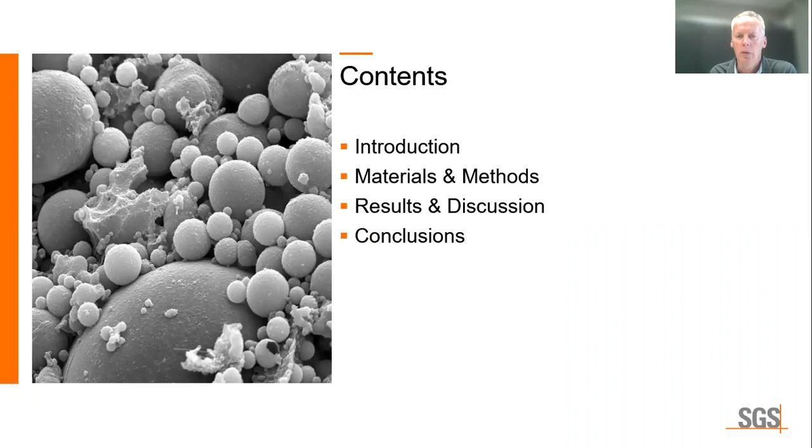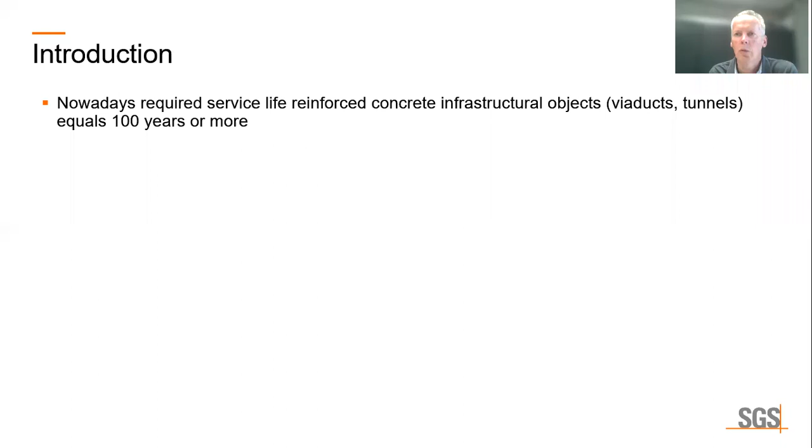Nowadays, the required service life of reinforced concrete infrastructural objects like viaducts and tunnels equals 100 years or more. The main degradation mechanism of these structures is chloride-induced corrosion of the reinforcement. The service life of such chloride-loaded structures is determined by the chloride load, the thickness of the concrete cover, and the resistance of the concrete to chloride penetration.

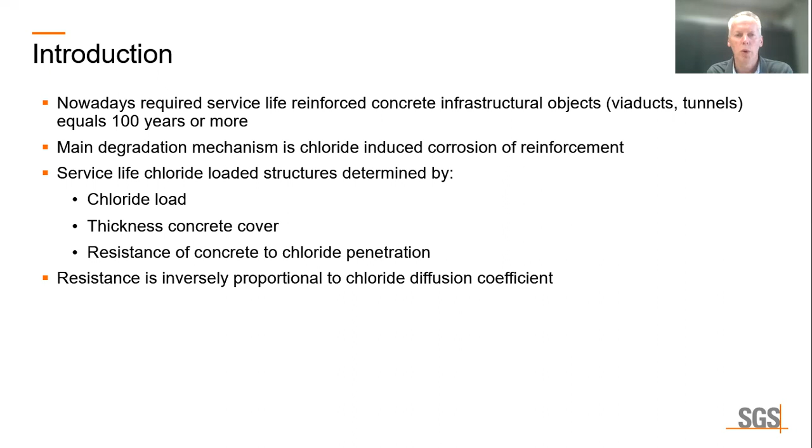This resistance is inversely proportional to the chloride diffusion coefficient. The chloride diffusion coefficient is time-dependent, and the time dependency is described by the so-called aging coefficient N. Here we show this in this equation, where D0 is the diffusion coefficient at the reference time T0, which is usually 28 days. T is of course time, and N is the aging coefficient.

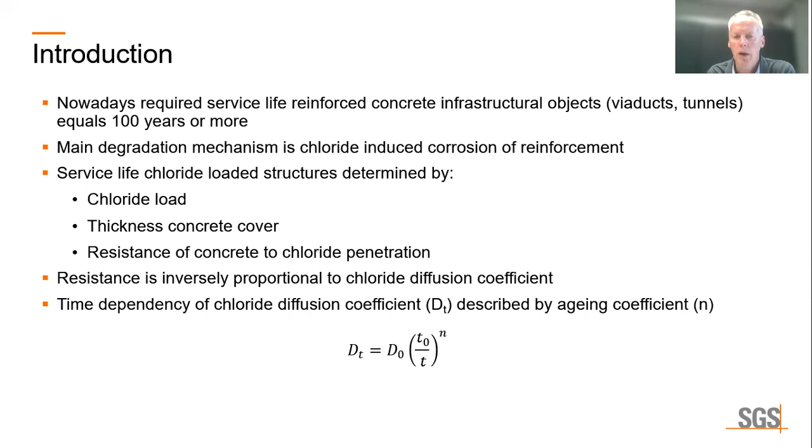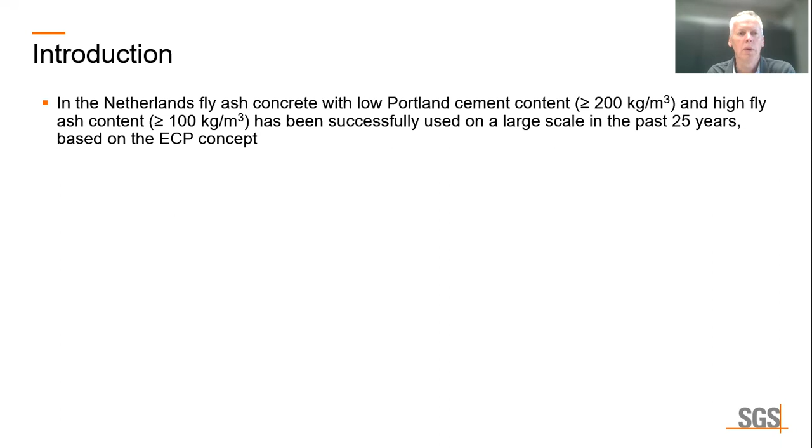In the Netherlands, we have used fly ash concrete with low Portland cement content and high fly ash content successfully on a large scale in the past 25 years, based on the equivalent concrete performance concept. However, it is well known that fly ash concrete has a high initial chloride diffusion coefficient, but shows a rapid decrease with time due to the pozzolanic reaction.

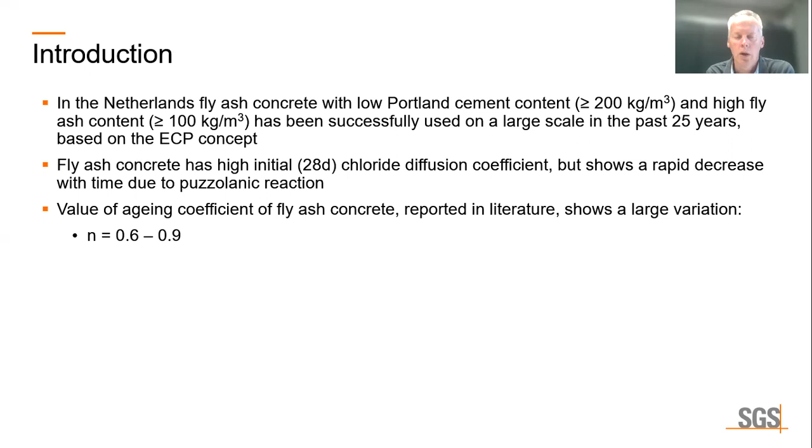Values of the aging coefficient reported in literature show a very large variation between 0.6 and 0.9, and such a variation has a very large impact on calculated service life. Therefore, a long-term research program has been performed to examine the effect on the aging coefficient of different sources of fly ash and different origins and strength levels of Portland cement.

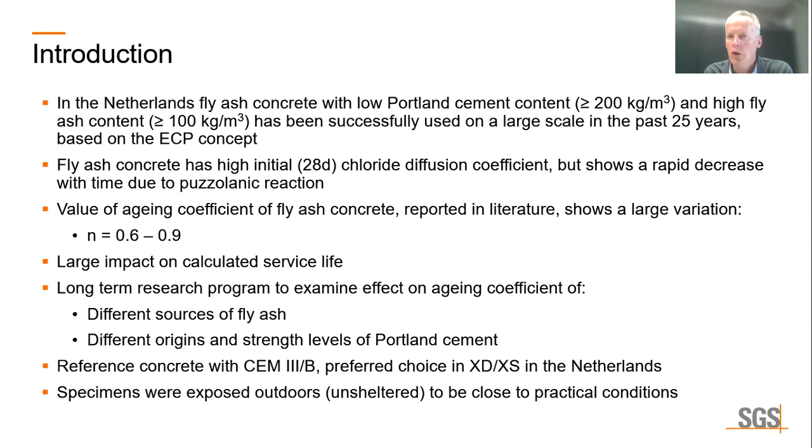In this program, we have used a reference concrete with blast furnace slag cement, which is the preferred choice in chloride-loaded environments in the Netherlands due to its high resistance to chloride penetration. All specimens were exposed outdoors, unsheltered, to stay close to practical conditions.

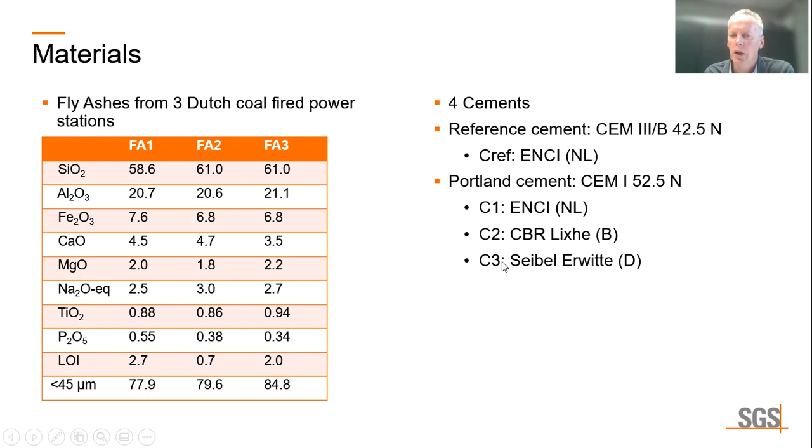We have used 4 cements in this investigation. The reference cement is a blast furnace slag cement from a Dutch cement producer. And we have used 3 different Portland cement qualities, all in the strength class 52.5 normal, C1 from a Dutch cement producer, C2 from a Belgian cement producer, and C3 from a German cement producer.

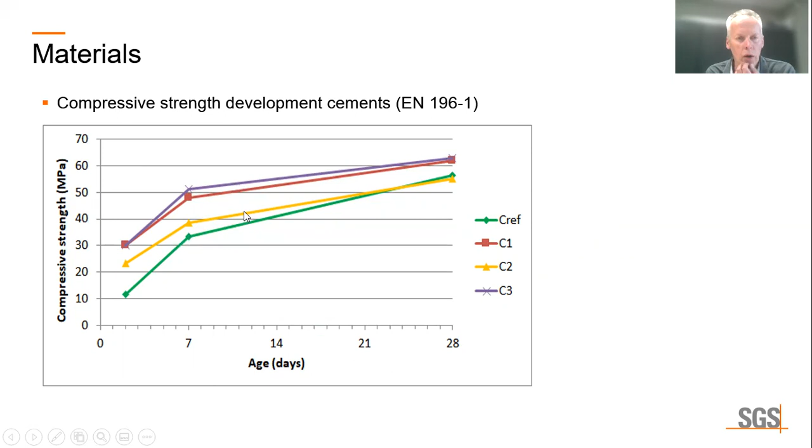If we now take a look at the compressive strength development of the cement, as measured by the European standard 196-1, we can see that the reference cement has the slowest strength development. C1 and C3, the 2 Portland cement qualities, have the highest strength development and are fairly comparable. And C2, the 3rd Portland cement quality, has the lowest strength development.

For the investigation, we have used 6 different types of binder. One is the reference cement with CEM III/B, and the other 5 are combinations with Portland cement and fly ash. The fly ash content is always 1/3 of the total weight of cement and fly ash. And in this table, we show the different combinations that we have investigated.

By combining Portland cement C1 with the 3 different fly ash qualities, we can investigate the influence of the fly ash origin. And by combining fly ash 1 with the 3 different Portland cement qualities, we can investigate the influence of the Portland cement quality.

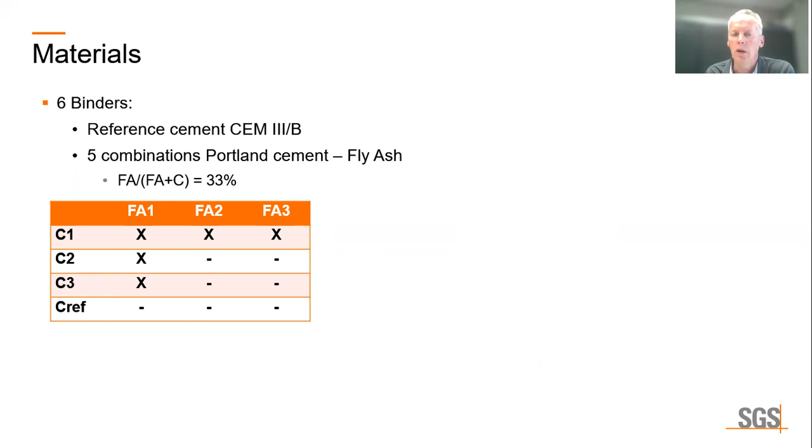If we now take a look at the concrete mixes, then in this table, the full concrete composition is shown. For all concrete mixes, the binder content was 360 kilograms per cube. And for the fly ash concrete mixes, the binder content is the total weight of cement and weight of fly ash. All concrete mixes had water binder ratio 0.45.

We used river sand and gravel with the maximum grain size of 16 millimeters. And the fly ash content in the concrete mixes was 120 kilograms per cube, and the Portland cement content 240 kilograms per cube.

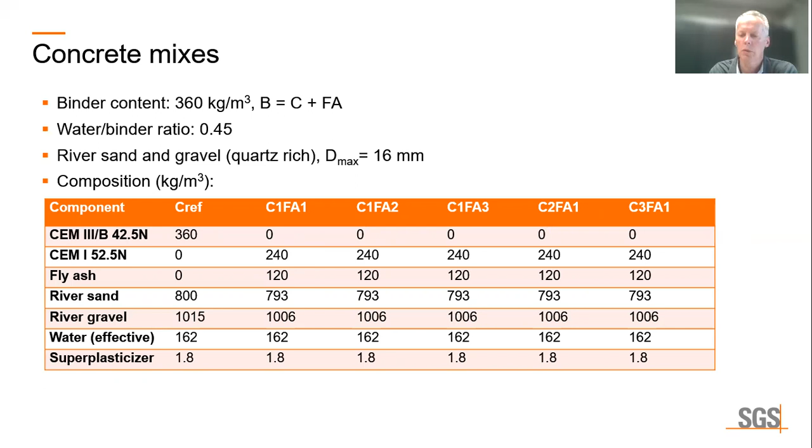Now let's take a look at the curing. The curing up to 91 days consisted of 3 steps, which had to assure that the fly ash concrete mixes show sufficient hardening under moist conditions. After casting, the mold was covered with a plastic foil and put in the climate cabinet at 95% relative humidity.

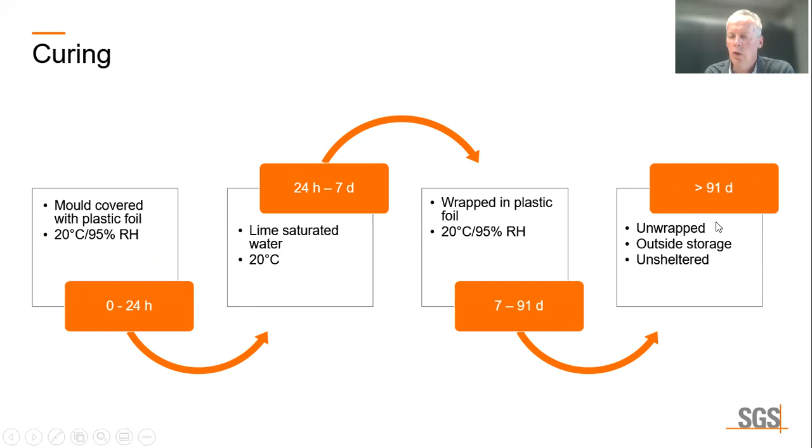After demolding, it was then stored in lime-saturated water up to 7 days. After 7 days, the cubes were wrapped in plastic foil and again stored in the climate cabinet at 95% relative humidity. And then finally, all specimens were unwrapped and stored outside under unsheltered conditions to be close to practice.

Now let's take a look at the test program. First, we have the main program, which was performed on all 6 concrete mixes. We first measured the compressive strength development up to half a year. And then we measured the resistance to chloride penetration by the rapid chloride migration test following the NT Build 492.

And this was done at 28 days up to 5 years. At the same time, we measured the electrical resistance by the 2 electrode method. And this test has been performed on the RCM samples prior to testing RCM. So it was also performed between 28 days and 5 years.

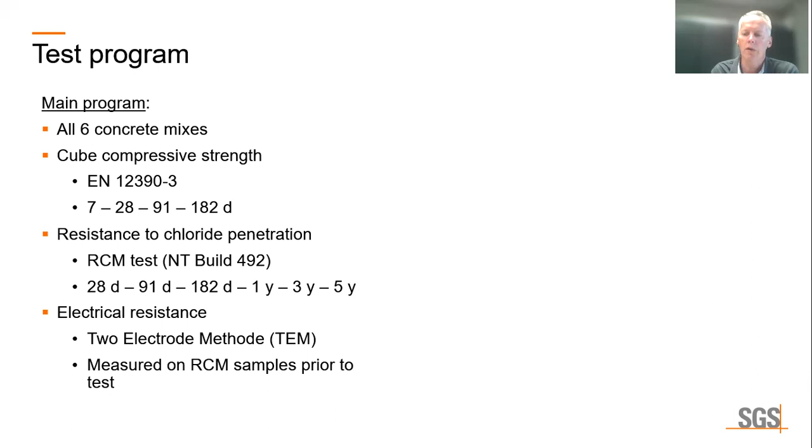Then additional testing was performed on 2 concrete mixes, the reference concrete and 1 fly ash concrete mix at the age of 3 years. In this additional investigation, we have measured the chloride diffusivity following the European standard EN 12390-11. In this method, specimens are immersed in a sodium chloride solution during 90 days, after which a chloride profile is determined from grinding 1 millimeter thick layers.

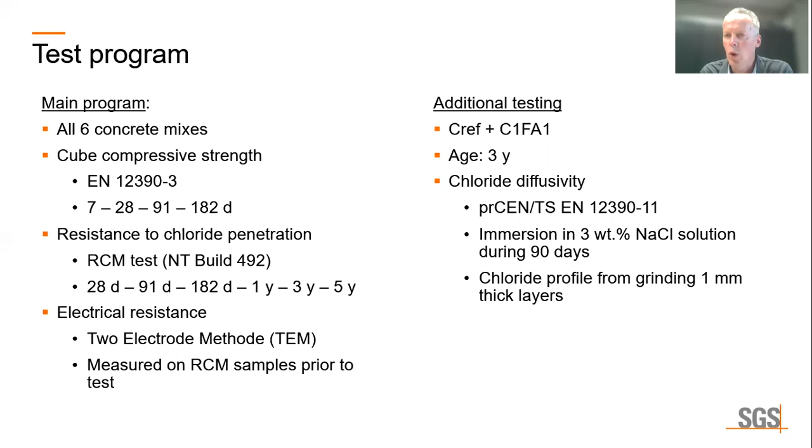So now let's take a look at the results.

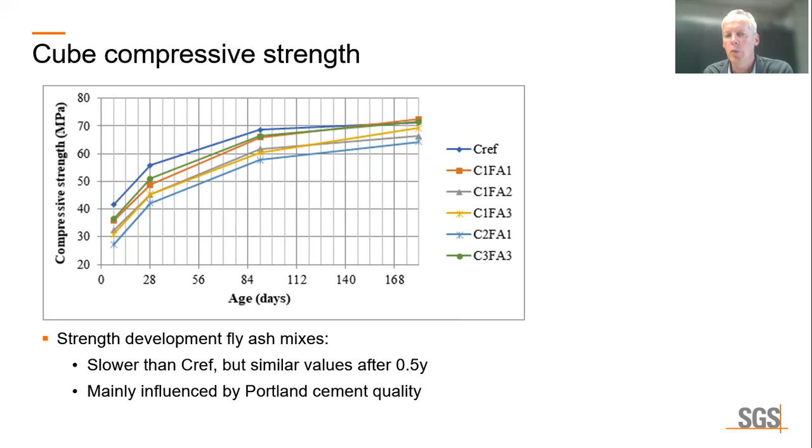a slower strength development than the reference concrete, but reach similar strengths after half a year. And within the fly ash mixes, we can see that the strength development is mainly influenced by the Portland cement quality.

Now let's take a look at the main results of the chloride migration coefficient, which is shown in this table for all testing times from 28 days up to 5 years.

If we then take a look at the results after 28 days, we see that all fly ash mixes show migration coefficients which are 1 order of magnitude higher than the reference concrete mix.

But then, after 1 year, we see a rapid decrease of the migration coefficients to a comparable value as the reference concrete. And after 3 years, all fly ash mixes even show lower values.

Then, after 5 years, the migration coefficients for the reference concrete remain constant, whereas that of the fly ash mixes

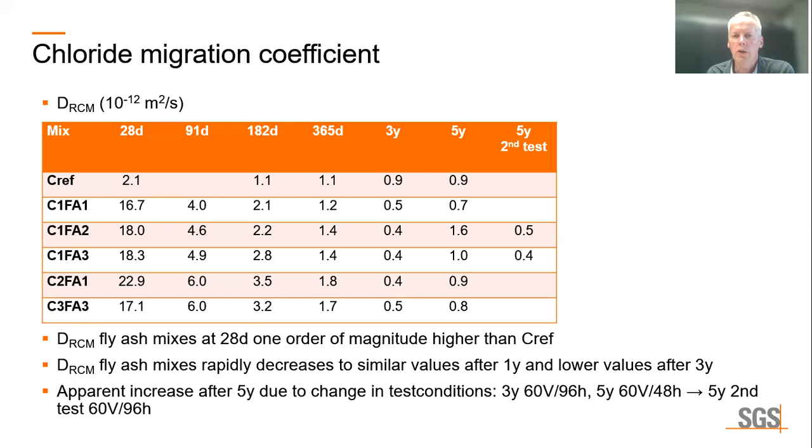seems to increase. However, we believe that this increase is an artifact caused by a change in test conditions.

After 3 years, we are at the outer limit of the NT Build standard, where we have to apply the maximum voltage and maximum test duration, whereas after 5 years, the test duration was 1 step lower.

We decided to rerun this test after 5 years for 2 of the fly ash mixes at the same test duration as after 3 years, namely 96 hours.

And we see that now we obtain a test result which is comparable to the one after 3 years. So this is the result that we believe in after 5 years.

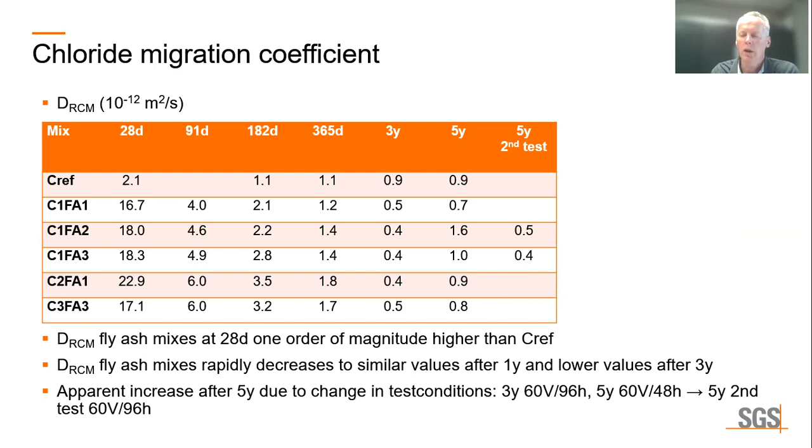Now let's take a look at the specific electrical resistivity. Here the results are shown for all of the concrete mixes. And we can see that there is a continuous increase with time for all of the mixes.

And if we take a closer look at the fly ash mixes compared to the reference concrete, we see that

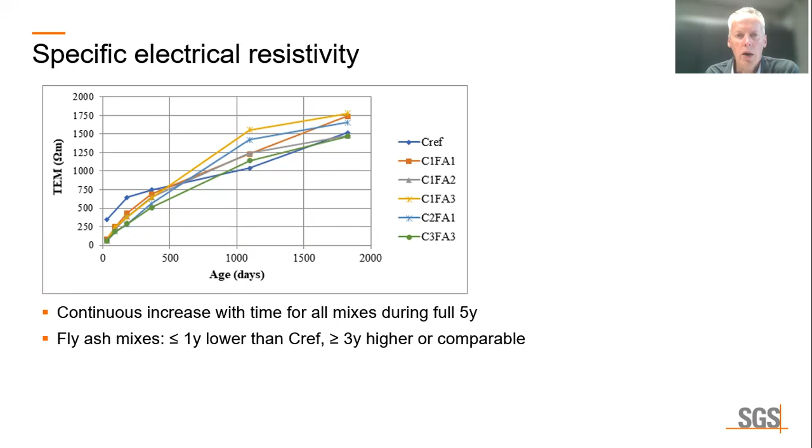up to 1 year, the electrical resistivity is lower for fly ash, but after 3 years, the resistivity is higher or comparable to that of the reference concrete.

Now, it is well known that the TEM result and the RCM result show a good correlation. And also in our investigation, this is the case.

In the diagram, we plot 1000 divided by the TEM value versus the RCM value. And we get a very good linear dependency.

And the constant, which can be derived from this linear dependency, is shown here, which is quite comparable to literature values.

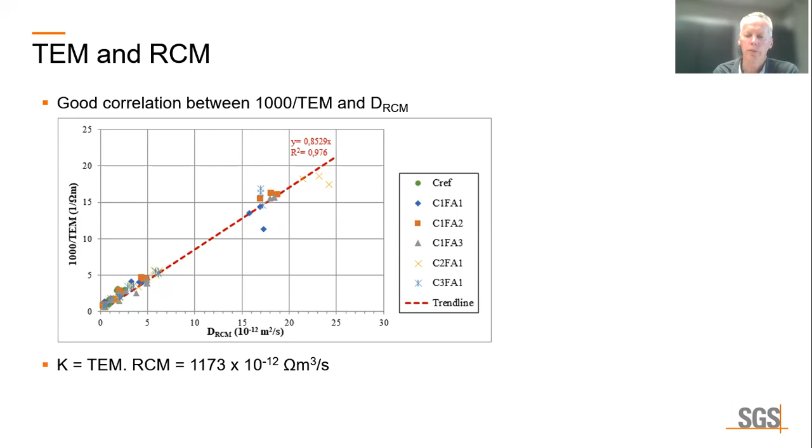Now, the main result of the investigation was to derive the aging coefficient of this long-term research program, and the results are shown in this slide.

First, we see the diagram on a double log scale of the RCM value versus time for the reference concrete and for the fly ash concrete mixes.

We can clearly see that the fly ash concrete has a very steep decrease of the RCM value.

And if we now derive the aging coefficients from the slope of these curves, we see that the fly ash mixes have values between 0.8 and 0.95.

And these values are much higher than that of the reference concrete.

However, this result is somewhat troubled by the results after 5 years, which have proven difficult.

So we have used a second method to determine the aging coefficient. For this method, we have used the K value from the linear relation between 1000 divided by TEM and the RCM value after 1 year.

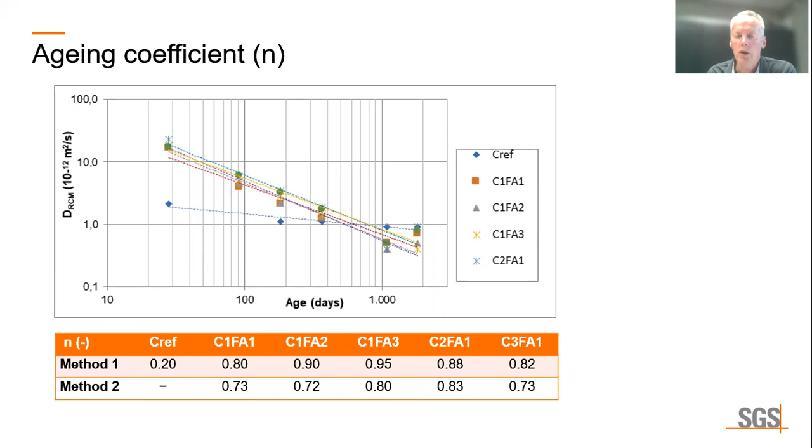If we then look at the aging coefficients derived by this method, we see that we have values of 0.7 up to 0.8, and that the 5 fly ash concrete mixes show quite comparable results.

Then we have the additional investigation, in which we have used the natural diffusion method to determine the chloride diffusivity for the reference concrete mix and 1 fly ash mix.

In this table, we show the results, and we can see that both concrete mixes have a chloride diffusivity of 0.7. It's almost identical, certainly if you take into account the standard deviation.

Here in this diagram, the chloride profiles are shown. So it's quite a narrow depth of 7 millimeters.

So the fly ash concrete mix has an almost identical diffusivity, and these values are in fairly good agreement with those of the RCM test after 3 years, which are shown here.

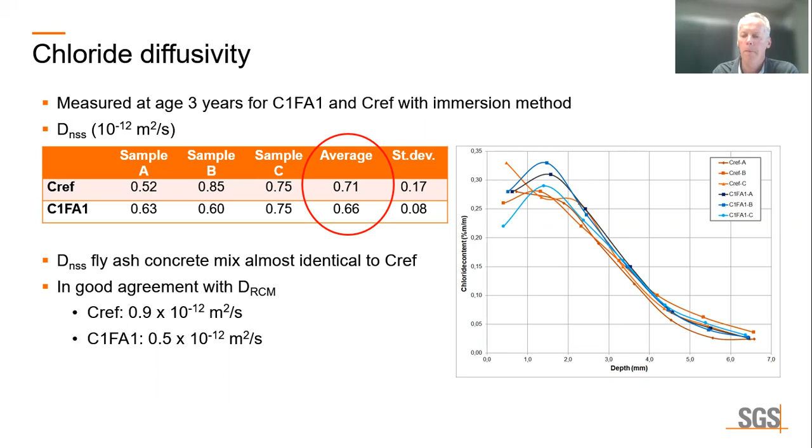So now I come to the conclusions of my presentation. First one is that the chloride migration coefficient of fly ash concrete is initially much higher than that of the

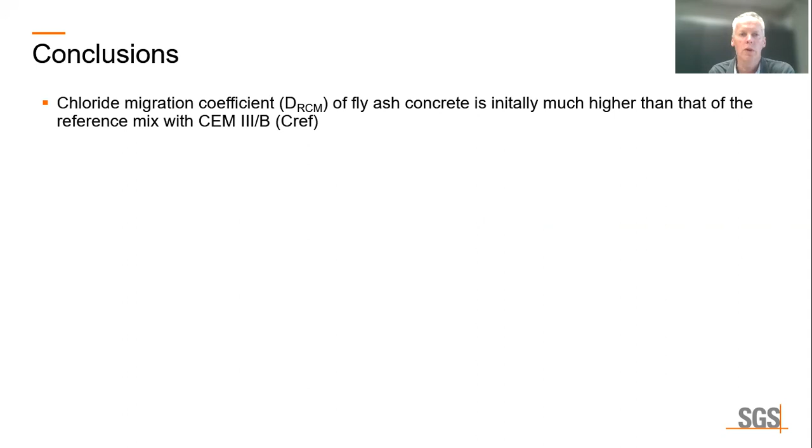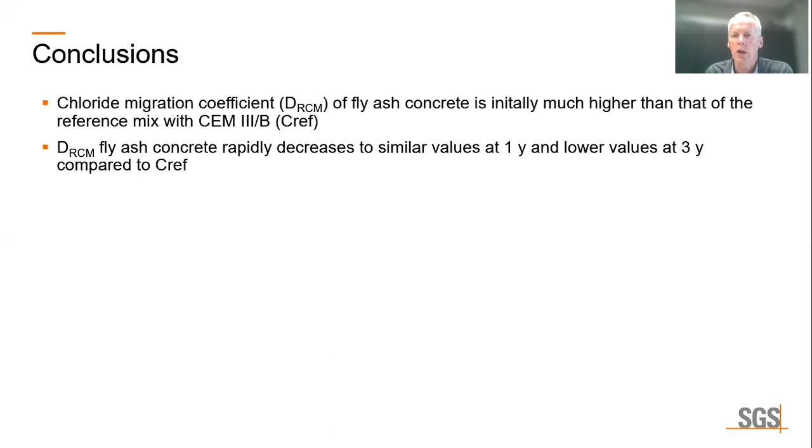reference mix with blast furnace slag cement, but the fly ash concrete shows a very rapid decrease to similar values at 1 year and lower values at 3 years.

Both the accelerated method and the non-accelerated immersion method confirm that the chloride penetration resistance of fly ash concrete is equal or better than the reference concrete mix after 3 years.

And that the quality of the fly ash has little or no effect on the aging coefficient.

And finally, that the N value of fly ash concrete varies between 0.7 and 0.8. These values are in very good agreement with the National Dutch Guideline on service life calculation of reinforced concrete mixes.